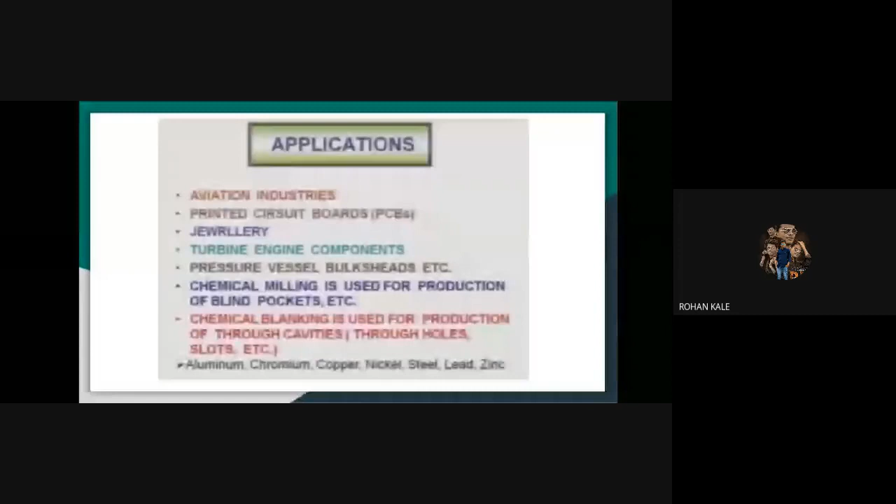And at the end of yesterday's lecture, we were discussing that last one, photochemical machining. So in short, first I will tell that, then we will go in detail. So the salient features, applications, and steps to be followed I have explained, and this setup also we have seen. Again, I have explained this example.

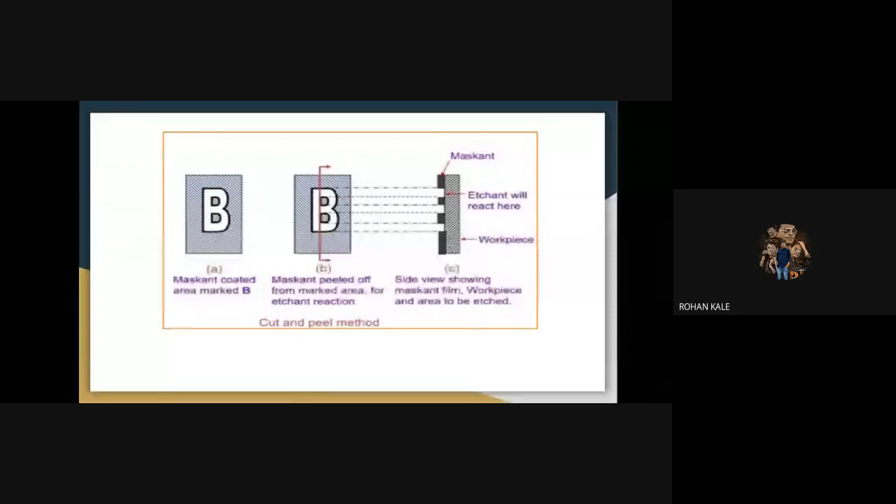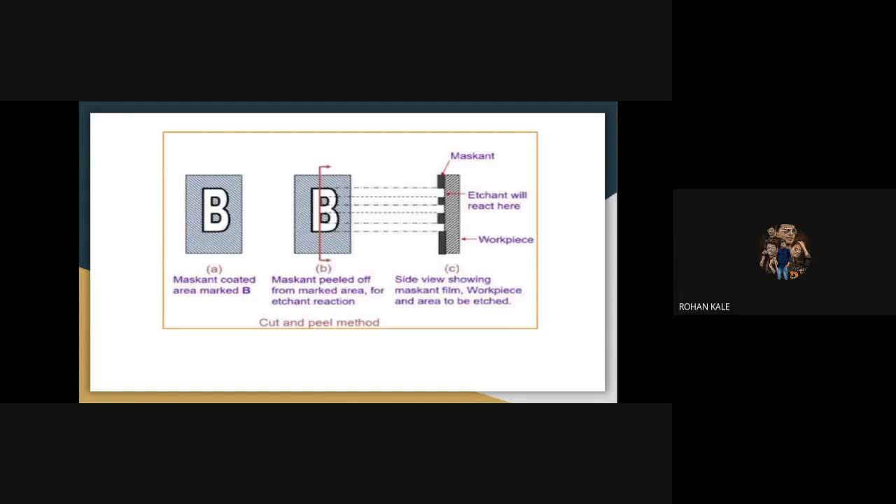Cut and peel method. First, you have to apply the maskant on all surfaces of your workpiece. All portions you have to cover, and then wherever you want to do the etching, that means the machining, or wherever you want to remove the metal, from that portion you have to remove the maskant. To remove that maskant means you have to cut the maskant from that portion, and then remove it by scrubbing or by peeling. Peeling in Marathi is called solun kadne.

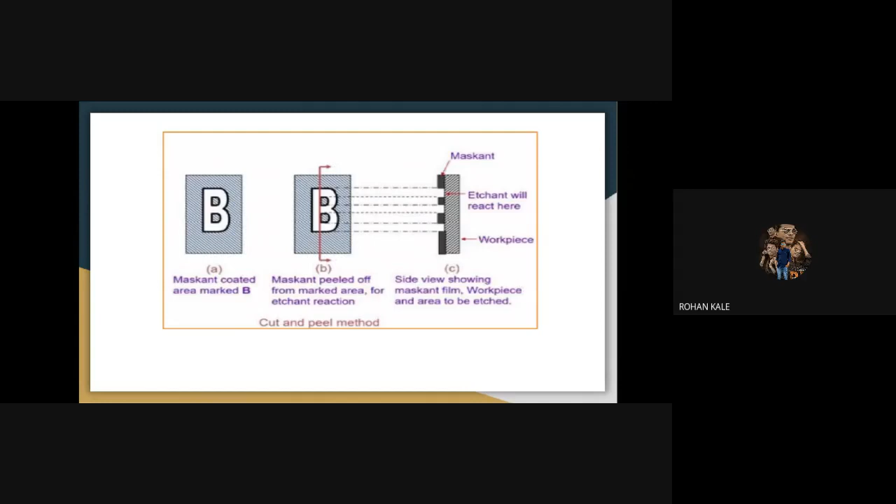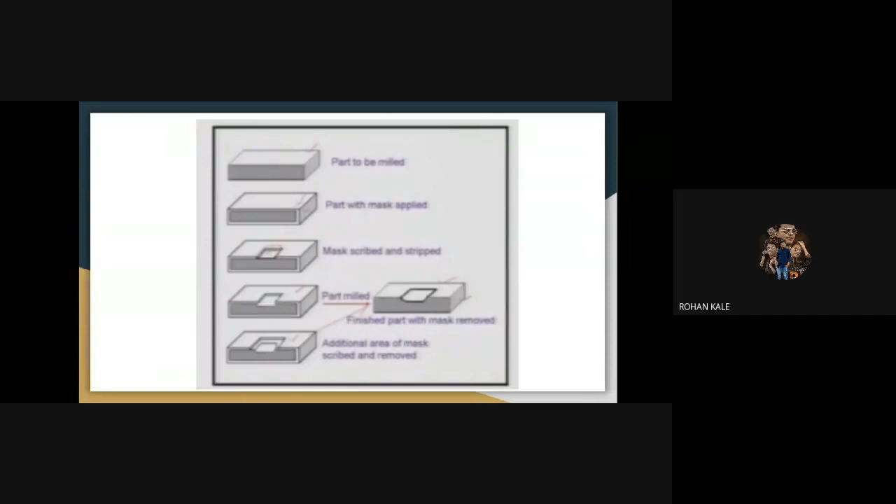So actually, this is the third kind of maskant applying technique. It is called photoresist maskant, or photochemical machining, also called PCM. In this method, photoresist is applied, and after that, a negative is applied to your surface. So you can see, first we have to clean the workpiece. Then you have to apply the photoresist coating. Like maskant in chemical machining, here also we have to apply the photoresist.

You can apply photoresist by dipping your workpiece in that photoresist solution, or you can spray the photoresist on your workpiece. So you have to apply the photoresist, and after that, a negative is applied to your surface. In this slide, here the negative is applied, and that negative is placed on the surface, and you can see that negative in this diagram. I have shown that the negative is applied to both sides of the surface. I have shown it with an arrow.

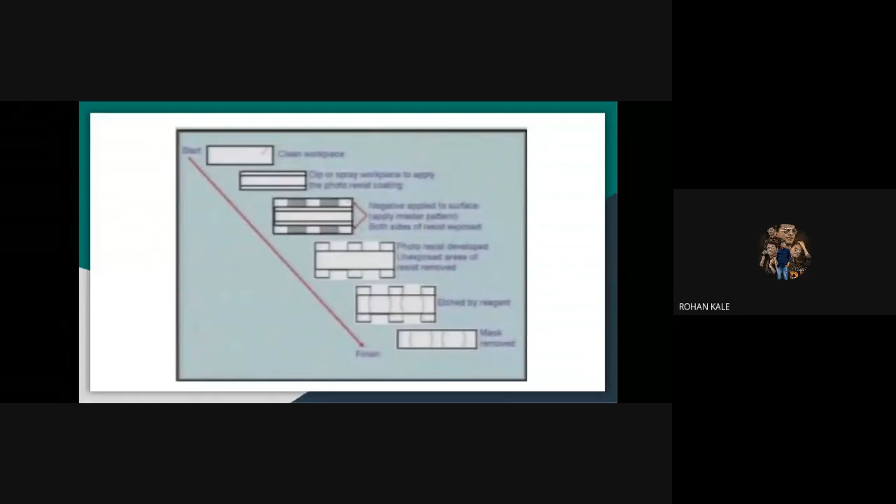Okay. So what I mean to say here is that you can apply masking by any of these three methods. First is the cut and peel method, the second is screen printing, and photochemical masking. But your final aim should be to get a workpiece of a desired shape and size in the minimum time.

Now, what happens actually? Sometimes debonding takes place. You have applied masking, but somehow that masking cracks or it is not properly adhered, and there is a way for the etchant to go inside, to contact your workpiece and react with that particular area. Okay, so that debonding should not happen. So that care you have to take.

And if it happens, then what happens? You are going to get a defective part on your workpiece, because you had not planned to remove the material from that particular area. Debonding means what? Through that mask, your reagent will react with your workpiece, and through that part also the material will be removed. So because of debonding, that material will be removed.

Okay, so one should be very careful and check carefully that there is no cracking, so no debonding of the mask from the workpiece, so that material does not get removed from the undesirable area. Okay, so that care we have to take to ensure proper adhesion of the mask. To ensure adhesion of the mask on your workpiece, chemical cleaning is needed.

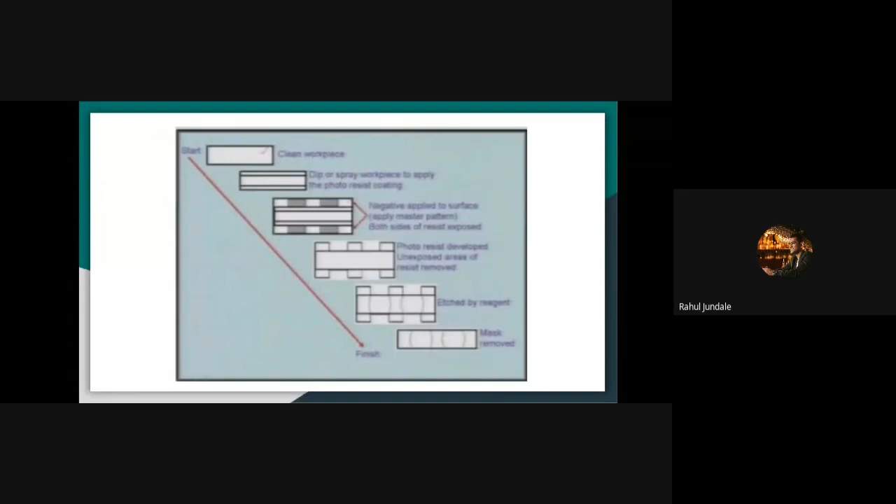Okay, so due to that, the first step in chemical machining is chemical cleaning. So chemical cleaning is most important, and we have to do it before applying the mask. Okay, now there is one concept, that is undercutting. In chemical machining, there is a concept of undercutting, and this is a very important point because, as you know, you apply the mask, and if it does not get adhered to the workpiece, then what happens?

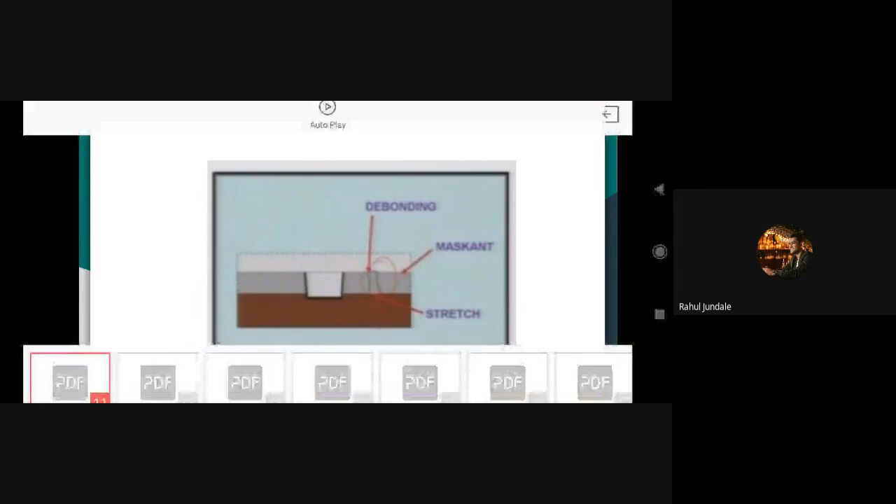One minute, I will allow some students who come inside.

So I was talking about stray cutting. This is a very important point because, as you know, you apply the mask, and if it does not get adhered to your workpiece, then it will be loose, and debonding or demasking will take place on your workpiece surface, and the etchant will penetrate through that particular area, react with your workpiece surface, and remove the metal from the place where you do not want to remove any metal. So if debonding takes place, then stray cutting will take place.

If I repeat once again, if debonding takes place, then stray cutting will take place, whatever I mentioned just in the earlier slide, here. So if metal is being removed from the debonded area, then that will be called stray cutting. Okay. In Marathi, I will explain again.

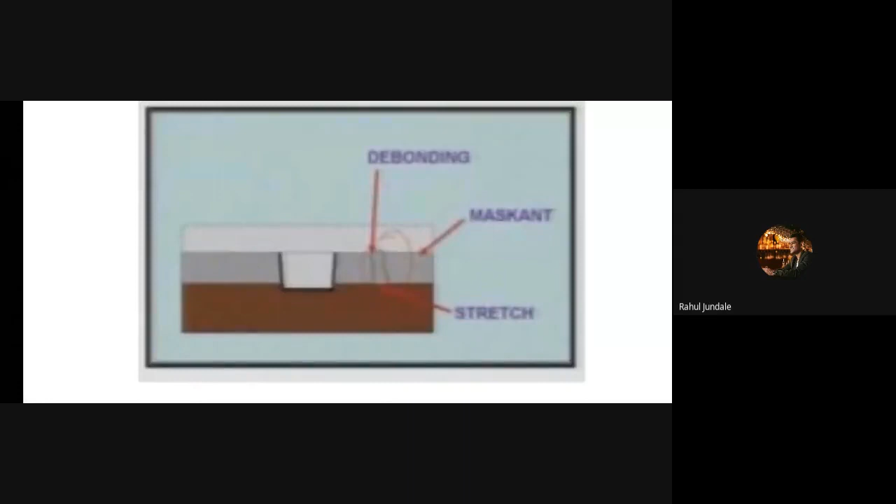Okay, and the material is removed. So it is called stray cutting.

So just like stray cutting, this concept is also applicable in the photochemical machining process. Okay, so the type of cleaning is a function of what type of maskant you are using. You have to first clean your workpiece chemically, and the type of cleaning depends on what your workpiece material will be, and what is the depth of cut to which you are going to machine.

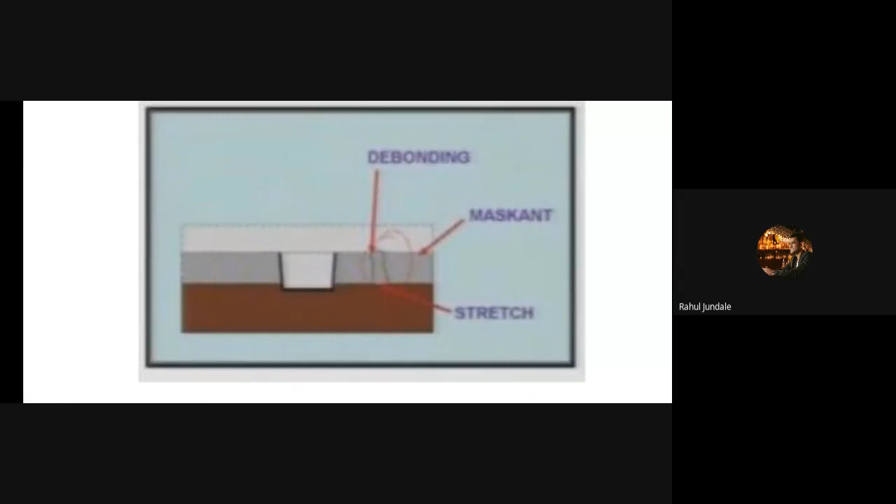Okay, so cleaning of porous material is definitely very difficult, because whatever liquid you are using for cleaning will get penetrated inside the porous material, and that care you have to take. So once again I am repeating, to ensure the proper adhesion of the masking material to your workpiece, you have to go for chemical cleaning, correct?

Chemical cleaning. Again, in case of the debonding mask, as we know, stray cutting occurs. So whatever the type of cleaning, it totally depends on what kind of maskant, what kind of work material, and what is the required machining. On those parameters, your type of cleaning is different. So again, cleaning of porous workpiece material is difficult because if you use the etchant on a porous workpiece material, the etchant may get penetrated.

So to avoid uneven material removal from your workpiece, you have to use fresh etchant continuously. You have to spray it on your component. You can spray fresh etchant, or you can immerse your component or workpiece inside your etchant tank. And to increase your material removal rate, you have to agitate your etchant as well as increase its temperature. That means you have to agitate and heat your etchant to increase the material removal.

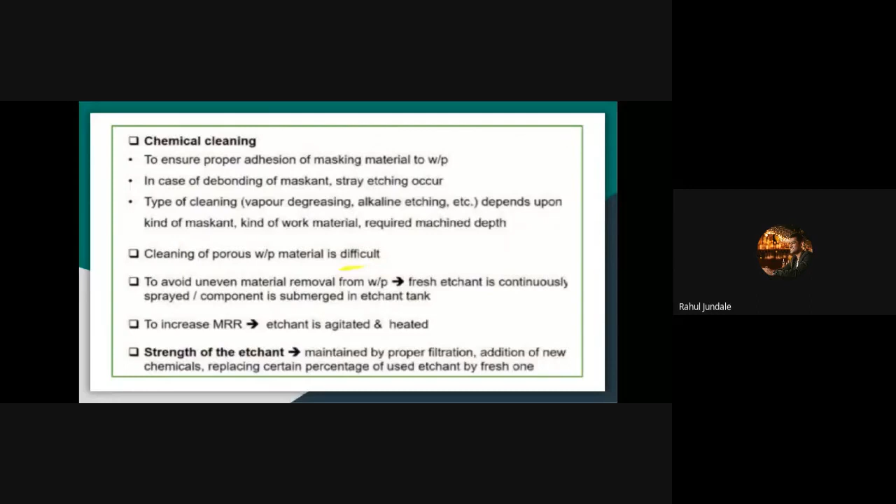Okay, it can increase, or you can maintain it by proper filtration as well as addition of new chemicals, as well as by replacing a certain percentage of used etchant by the fresh one. Okay, so take that point also into consideration.

Again, the material removal. In whatever machine, the material removal takes place in two directions. One is the downward direction, and the other is the lateral direction. You can see here. So our objective is to have the material removal in a downward direction, not in the lateral direction.

But it is a part of the phenomenon that takes place during chemical machining. You cannot avoid it. The downward direction leads to what is known as depth of cut. Whatever material is removed in the downward direction is called depth of cut. And the material removed in the lateral direction is called...

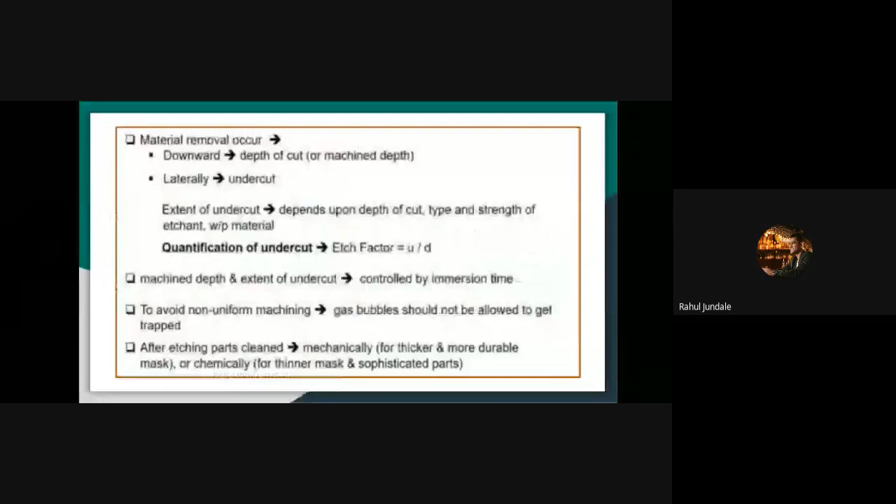There is a term in this chemical machining known as the etch factor. It is given by undercut divided by the depth of cut. You can see undercut is denoted by U and depth of cut is denoted by D. So using that you will get the etch factor.

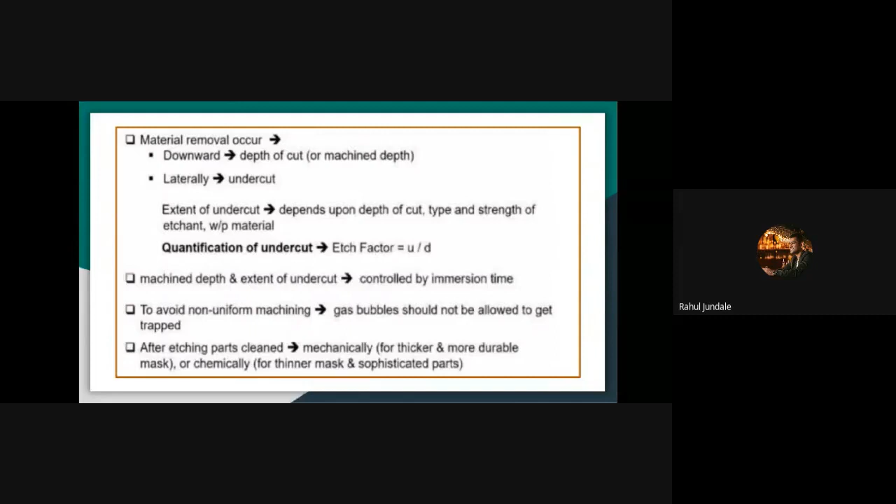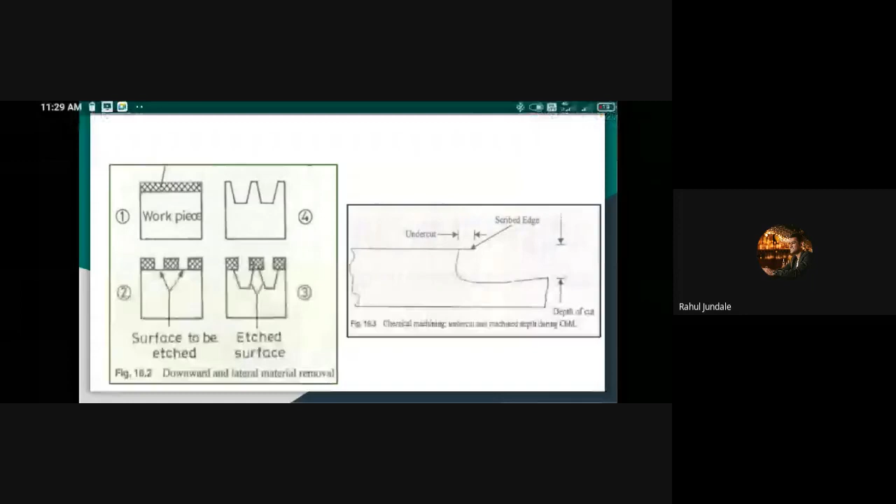Okay, what is it? Then I will proceed further. Are you getting my point or not? Chemical machining. In the chat box, say yes or no so that I can proceed.

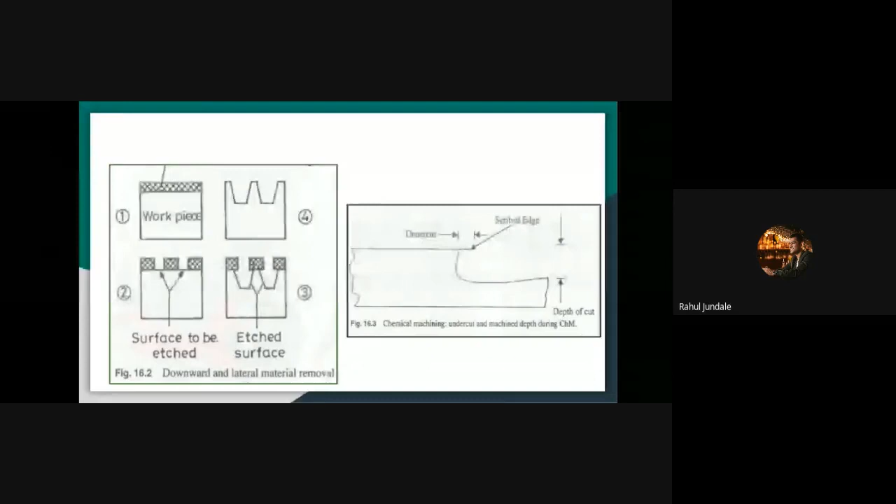Okay, let us move further. So I was talking about the methods of applying the maskant. As I have already mentioned, there are three methods or techniques for applying the maskant. The first one is the cut and peel method. Second is the screen printing, and this. So I will go on the first one, that is the cut and peel method.

Now in this method, neoprene, butyl or vinyl based materials are used as a maskant. Please note down this. Neoprene, butyl or vinyl based materials are used as maskant in this cut and peel method. As I have already mentioned, the maskant should be such that it does not react with your etchant, and it should not react with your workpiece. It should not react with your etchant, as well as it should not react with the workpiece material.

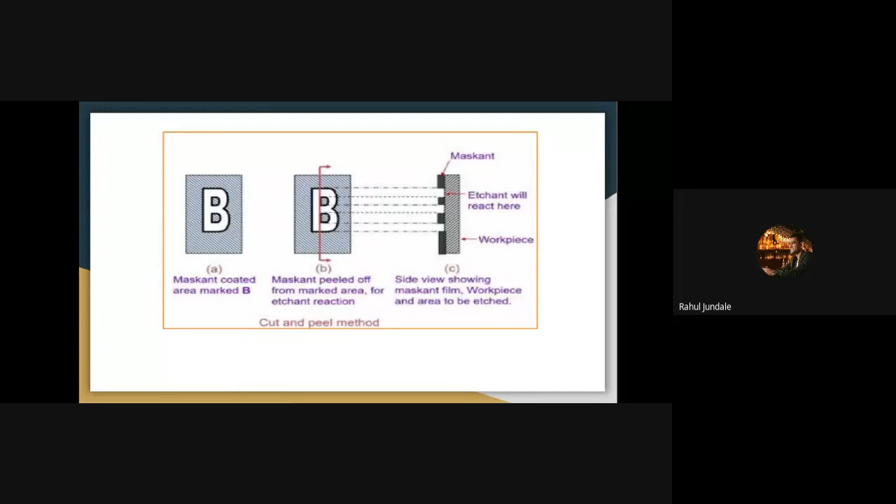So firstly, I have applied the mask on the whole surface of your workpiece, except the B letter area. That means only on that B letter portion the etchant will react, where you have to remove the material. So by cutting and peeling off the mask, you can remove the mask from the marked area to expose that area to the etchant. You can see here in the side view the mask and the peeled part. The other remaining parts are masked, and the B letter part is the area that needs to be etched.

So that I have explained and shown in this slide: peel off the mask from the area where you want material to be removed, and the rest of the area or faces should remain masked so that no chemical reaction takes place with the etchant. And accuracy using this cut and peel technique often lies in a range of 130 micron to 750 micron.

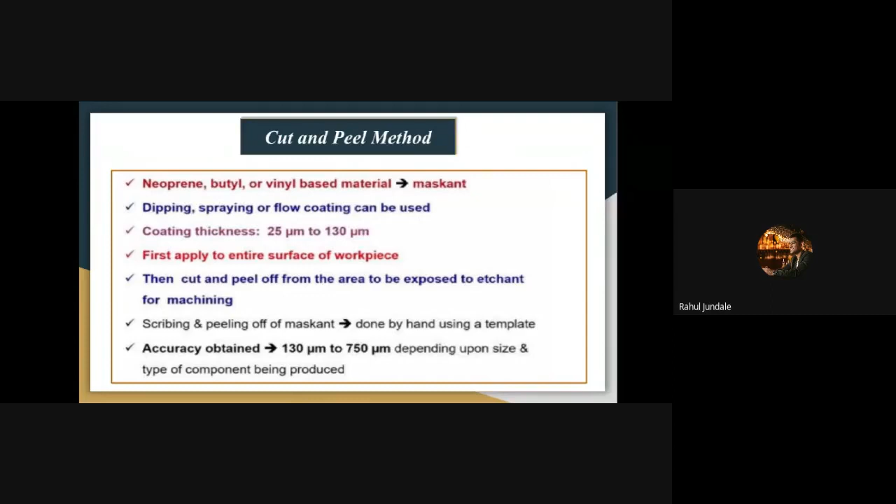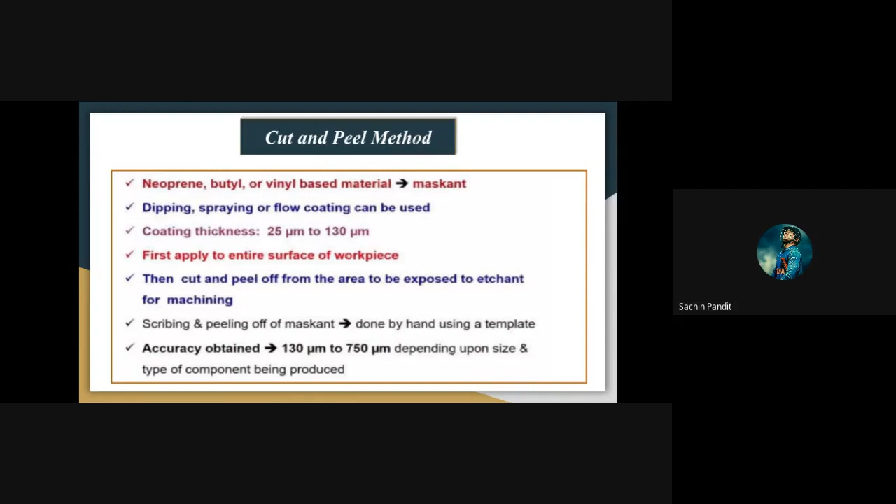And the machined depth in chemical machining depends upon the etching time, and usually the work is often tapered in nature. Suppose you can see here in this slide what the machined depth is in chemical machining. Actually, it depends upon your etching time, and usually the work is often tapered in nature in chemical machining.

Just like, suppose this is the hole that you want to obtain, and that has to be made. Actually you want the hole rectangular, but after etching you can see the fourth one, you got a tapered angle at the top surface.

Okay, that means undercut happens. Undercut happens here. So while etching, you have to take care of your depth of cut as well as the etching time. Okay, so you get that tapered workpiece.

In this cut and peel method, as I have mentioned, dipping, spraying, or flow coating can be used for application of the mask on your workpiece surface. And the coating thickness in this case varies, as I have already mentioned, from 25 micron to 130 micron. Okay, again you can see this diagram.

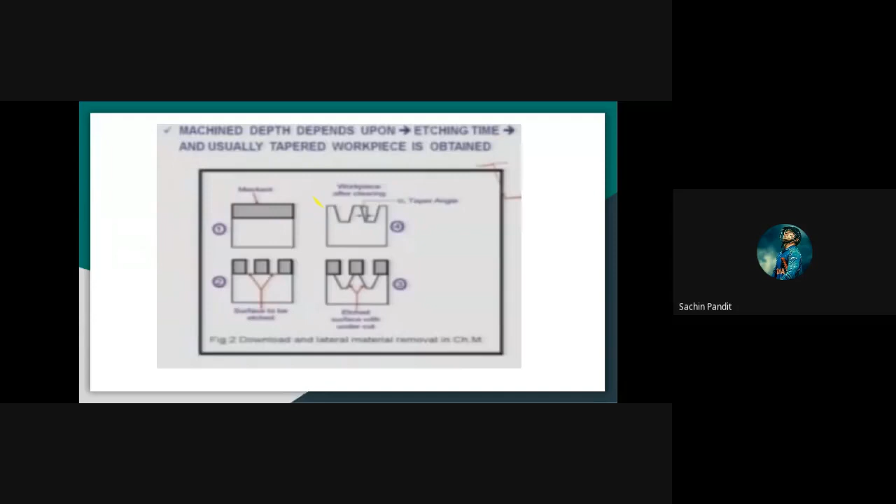Correct. So as you can see in chemical machining, if your masking is not done properly, then you will get this tapered work. Okay. So this is about the cut and peel method. Again, you can see here, this is another example I have shown.

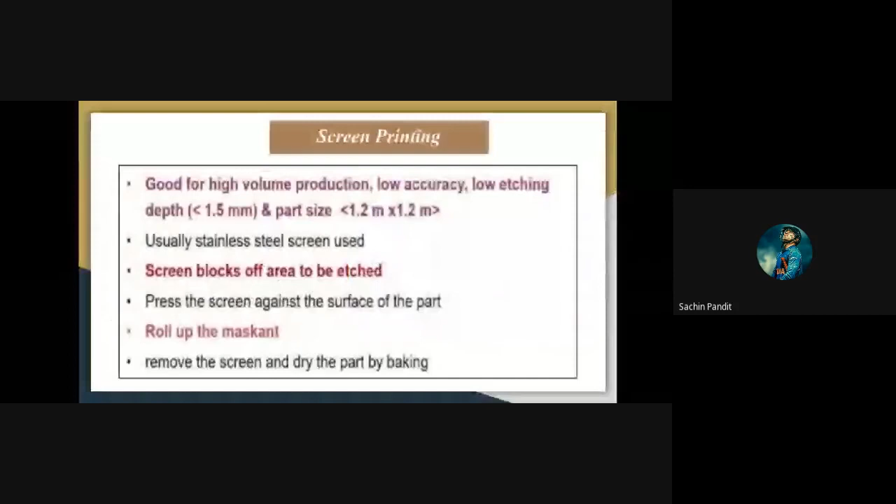Now we have another method that is called the screen method, screen printing. Screen printing is another technique of applying the mask. In screen printing, the mask is applied only on those areas where you do not want to remove the material, unlike the cut and peel method. Here also in screen printing, I repeat, the mask is applied only on those areas where you do not want to remove the material.

In the earlier case, we were first applying the mask on the whole surface. But in the case of screen printing, we are applying the mask on the area where you do not want to remove the material. I will give just an example. If you have the workpiece, you can form a screen. Suppose the area where you want to remove material, you will make the screen such that there is a cover by the screen.

Then you apply the mask on the rest of the portion by either spraying or by a brush or by any other means. But the area where you keep the metal screen, there is no mask.